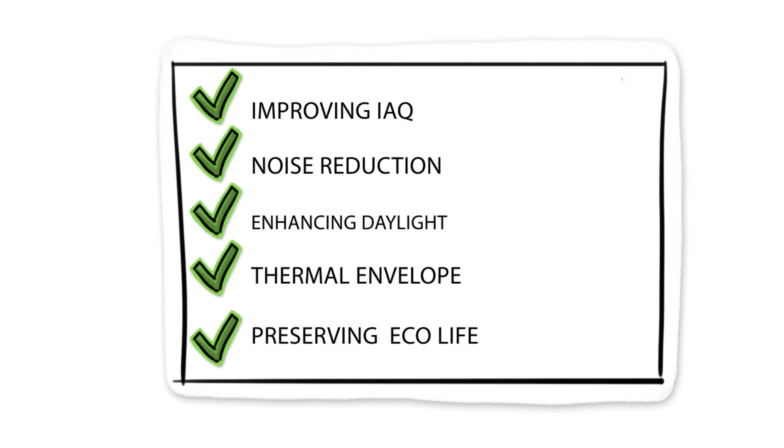When I decided to do my master's at the British University in Dubai, in the climate and comfort class, Dr. Hanan introduced what is biomimicry.

The word biomimicry is composed of two words, one being bios, that means life, and the other being mimesis, that means to imitate.

We are only 1% of all species that exist in the whole planet. The other 99% long ago have been solving their problems, but it takes us a long time to figure out and study the link between how they survive or adapt, and in contrast how we could do our role.

But how should we start? In my case, I started with selecting the case study, then searching for the ideal natural concept, then finally solving the case study problems by analyzing the natural concept.

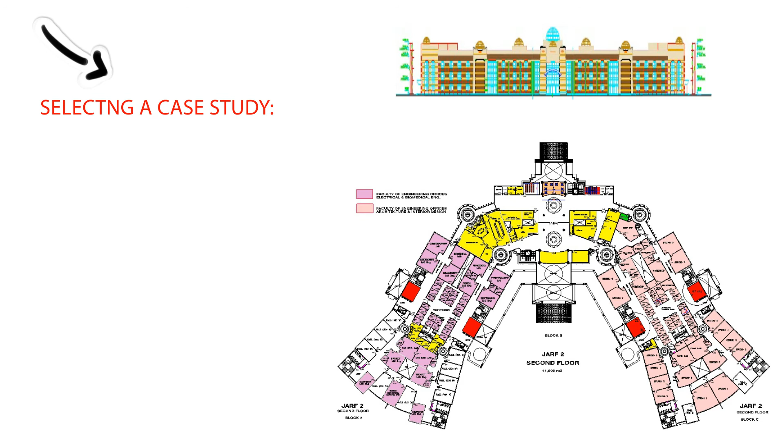I have chosen Ajman University, specifically the interior design department, as a case study, located in Al Jarf, Ajman. Our department is located in Block C, and we have 29 staff members' offices.

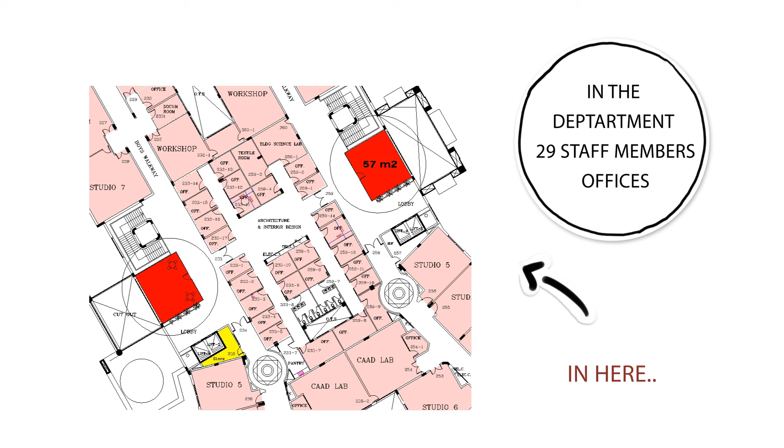The aim was to solve the issues that affect the employees' health and comfort. For more details, a survey was conducted, which resulted in the following 5 strategies.

Noise pollution in the department due to the existence of students around, affecting staff member concentration. Thus, noise reduction is one of my strategies.

Improving indoor air quality in order to provide a healthy environment around.

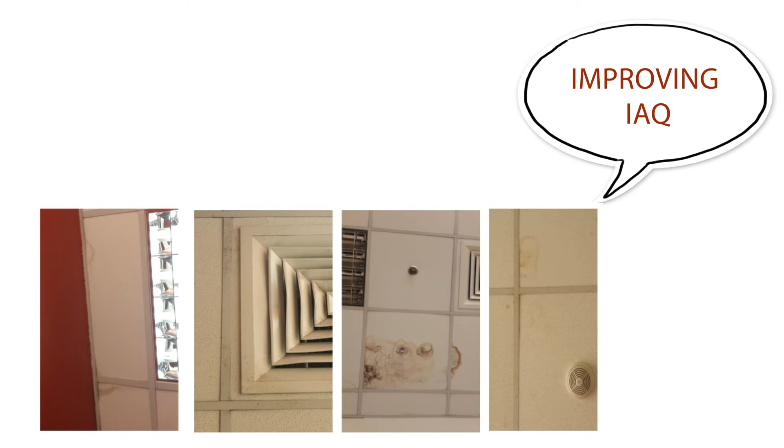Construction work around the university affecting the surrounding ecosystem.

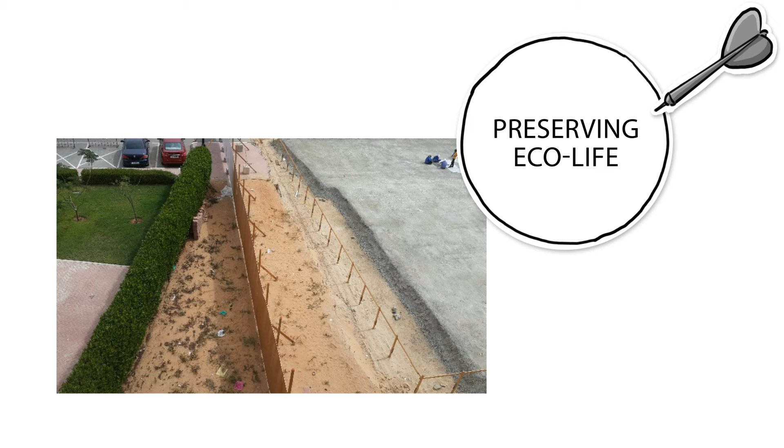Thermal insulation, double glazing, and wall insulation.

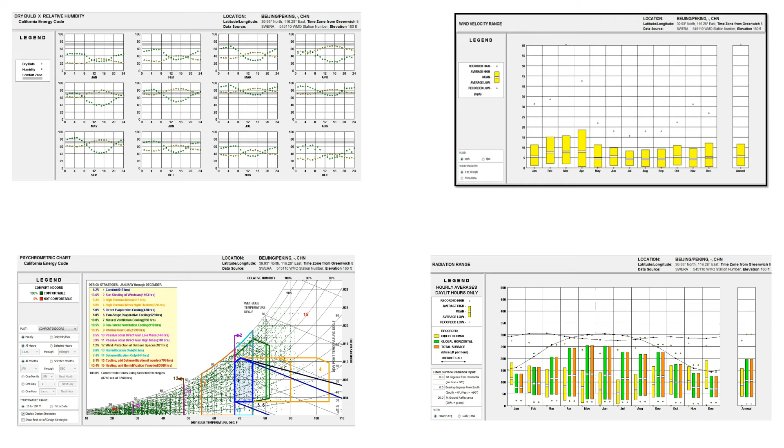After 2 months of searching for the ideal natural concept, finally the idea was discovered.

Salvadora persica, toothbrush tree, miswak, siwak - these are all given names for the same tree. My natural concept: preserving eco-life.

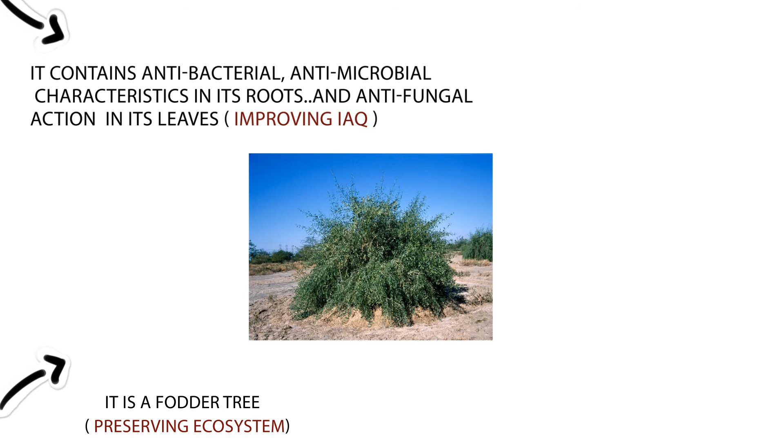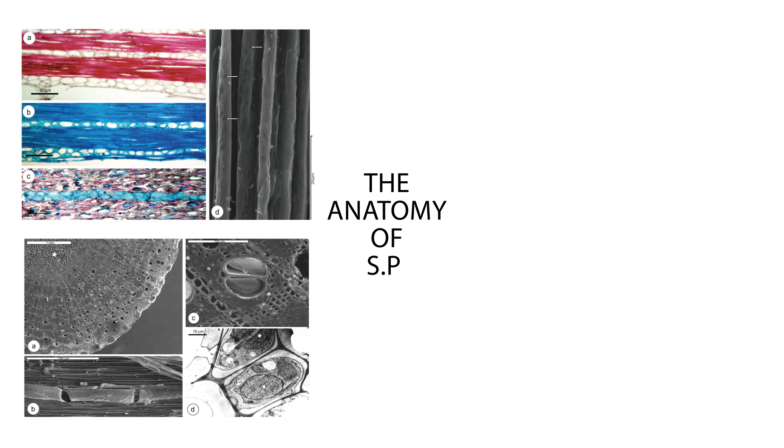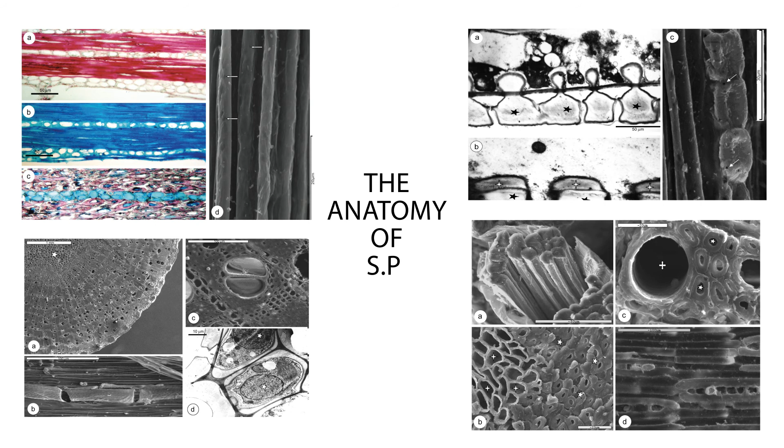The anatomy of Salvadora persica has been analyzed as well. Then I started the creepy Ecotect program.

Enhancing daylight: Office number 260 is very gloomy, as clearly shown.

Holes in the wall illustrate how the pits allow water to pass, however bacteria and gas bubbles are not. Solar tubes can do the same function, providing access to daylight for the gloomy office.

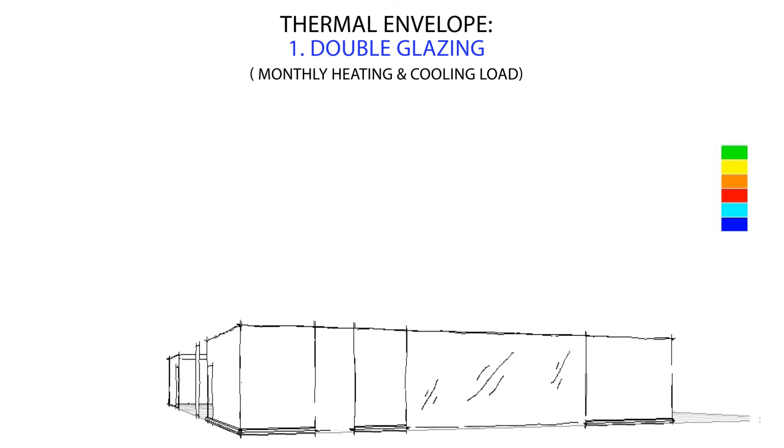Double glazing windows were replaced instead of single glazing to reduce heat gain and loss. As shown in the graphs, monthly heating and cooling load was reduced by almost 20%.

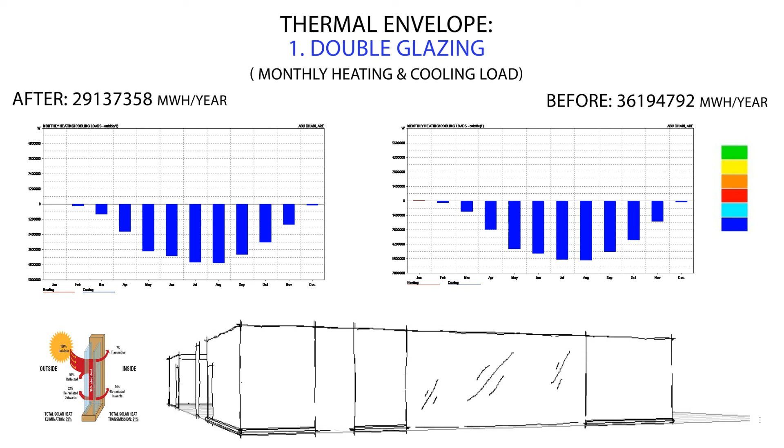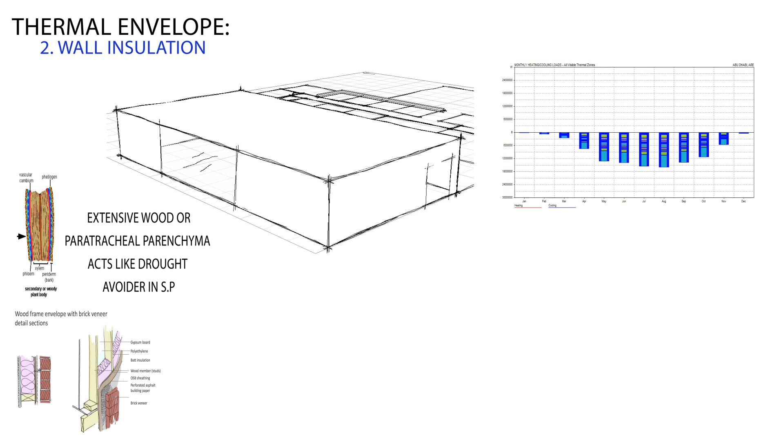Extensive wood acts like a drought avoider in Salvadora persica. After material improvement by using a wood frame envelope, the results show monthly heating and cooling load reduced.

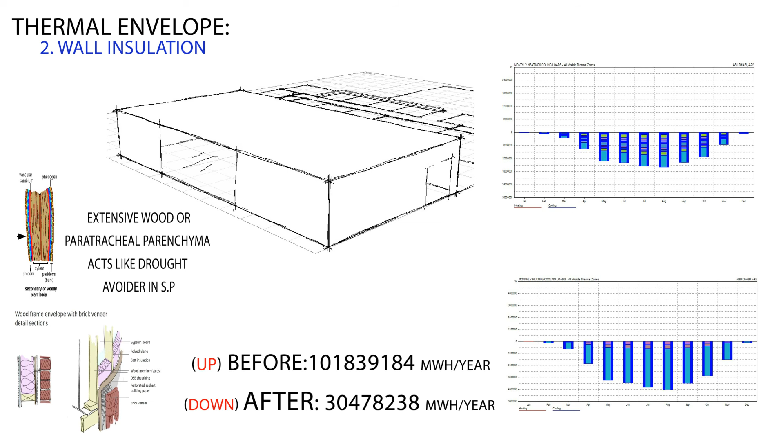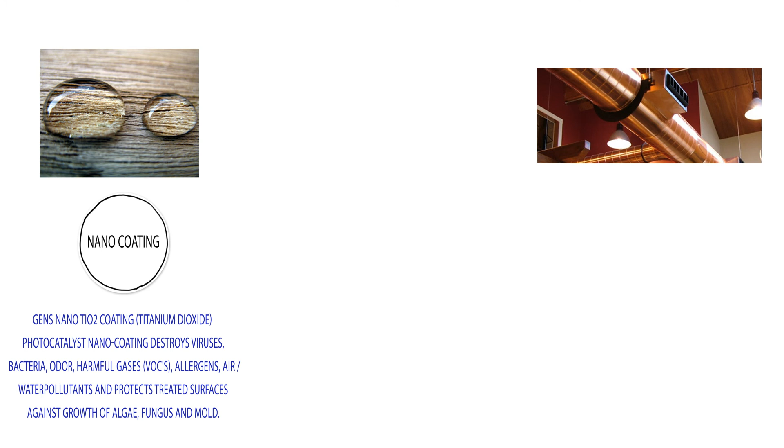The following strategies have been studied through literature review. After searching about how to control fungus growth in HVAC, I found 3 solutions: nano coating, UV light in HVAC, and copper ions.

Salvadora persica tree contains a corky tissue, which can be a perfect sound insulation and sustainable as well. Cork flooring works as acoustical insulation. Plants in general act like sound insulation as well.

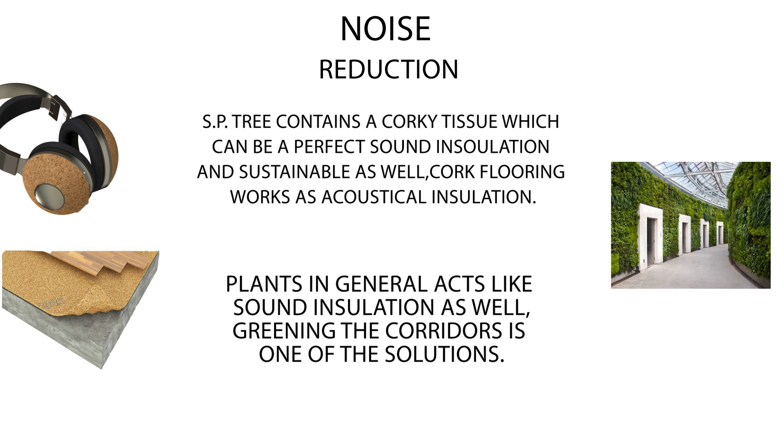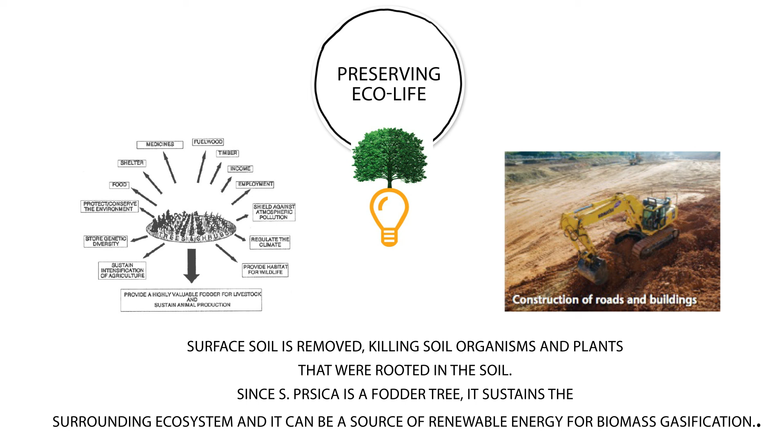Greening the corridors is one of the solutions. Surface soil is removed, killing soil organisms and plants that were rooted in the soil.

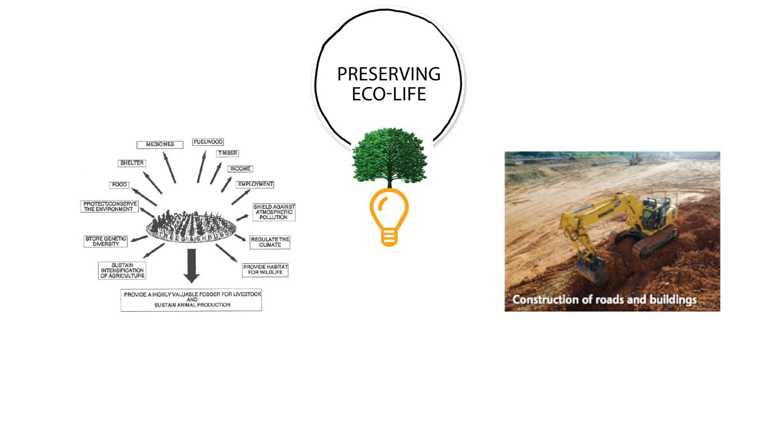Since Salvadora persica is a fodder tree, it sustains the surrounding ecosystem, and it can be a source of renewable energy for biomass gasification.

Now it's a perfect place to work in. We provided natural light, we improved the indoor air quality, and finally we reduced the noise.

After today, all the employees will be satisfied with their working place. Finally, mission accomplished.